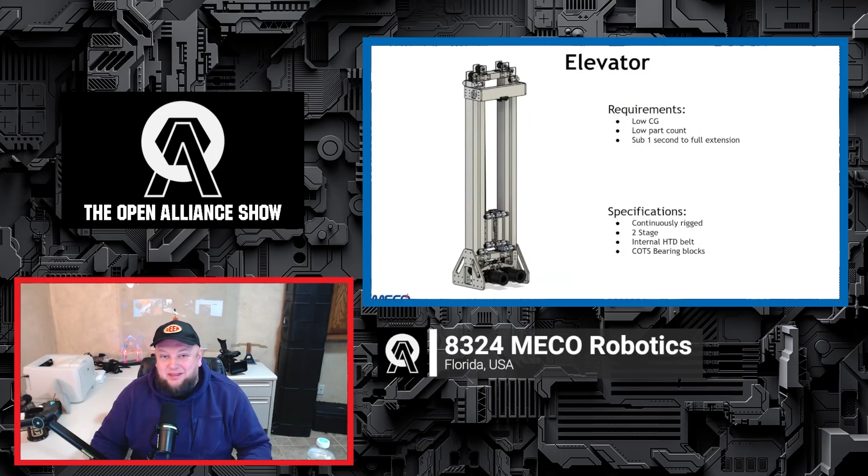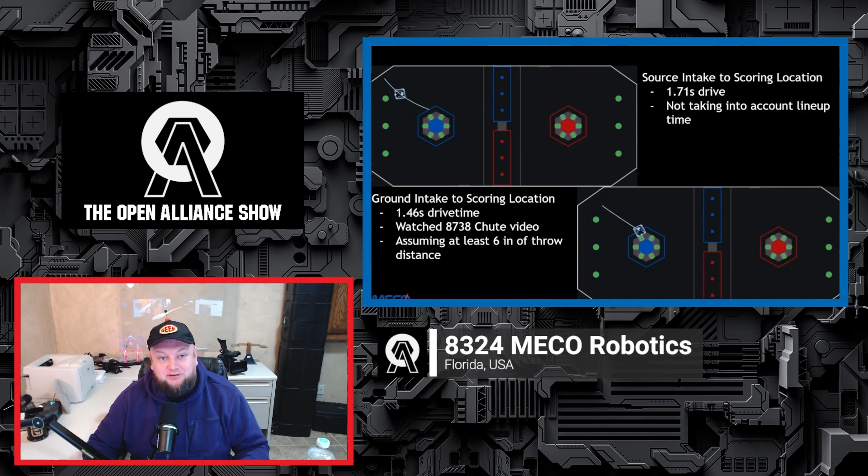Coming up on this edition of the FRC Open Alliance Show, 8324 MECO Robotics from Florida is in to catch us up to speed on everything they've been working on. We jump into their game strategy a little bit, but really hitting hard into their robot design, where they're at so far in regards to CAD and showcasing some prototypes as well. They're doing something really interesting with a dual intake approach for the Coral this year and showcasing how they're looking at scoring with this fork interesting design that they're using for level 4 scoring as well too. So a lot of great stuff with that. We're talking about some of their custom machining and then jumping into some of their auto routines and pathing, what they're looking at doing for that. We'll walk through a couple different autonomous strategies that they have in mind as well. So let's learn more about MECO Robotics coming up here on the FRC Open Alliance Show.

Let's welcome on 8324 MECO Robotics coming in from Florida. They're competing weeks 3 and 4, and we can't wait to jump into all the awesome topics and progress that they've been working on so far.

So welcome, students. If you don't mind, can you introduce yourselves? Let us know what you do on the team, and we're going to hop right into some of your game design and strategy. I'm Nate, I'm the lead programmer on the team. I'm Lily, I'm the team captain and the media lead. I'm Aaron, I'm one of the designers. And I'm Mason, I'm the mechanical lead for the team.

All right, so we're going to go ahead and start off doing a little intro for our team. So we are MECO Robotics, we are a 5th-year team. We started right at the beginning of 2019. That also means our first season was 2020. We were in the unfortunate situation where the Orlando Regional was our first competition, so we were on the field for the drivers meeting, and that was when they had to send everybody home. So that was unfortunate. We switched online for about a year and a half before we started meeting back in person. And now we are located at Orange County Academy in Bithlo, Florida.

Bithlo is kind of an underserved part of the East Orlando community. Very poor infrastructure, there's no place to earn a GED, there's not many job opportunities or anything like that. So our goal with being here and running our FRC and our FLL team is to kind of provide a STEM outlet and a light in the community that didn't really have that before.

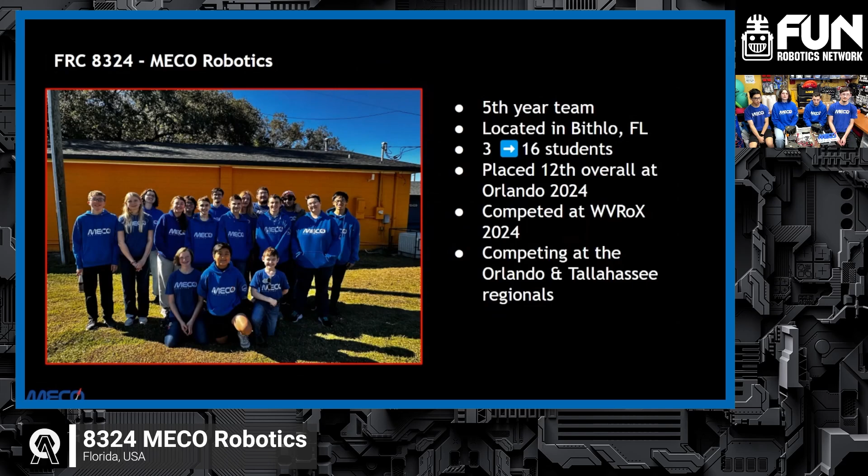So last year we had our best record year yet. We competed at the Orlando Regional, placed 12th, and we captained Alliance 7. That was also the first time we were ever Alliance captains in our team's history, which was awesome. Some other stuff notably that we've done is we went to the West Virginia Robotics Extreme this past off season. That was super fun, so we got to travel up to that. And then we'll be competing at the Orlando and Tallahassee Regionals this upcoming season.

So moving past onto that, I'm going to go a little bit into our robot design and kind of how we decide on what design we want to focus on for the year. So for the past season and this season as well, we compile a MoSCoW list at the beginning of the season, which a lot of teams do. It's basically must have, should have, could have, won't have. So basically we go through a list of what abilities we want the robot to be able to have. So obviously our number one on must have is swerve drive, that's mandatory, we definitely absolutely want that. All the different scoring elements that we want to be able to complete.

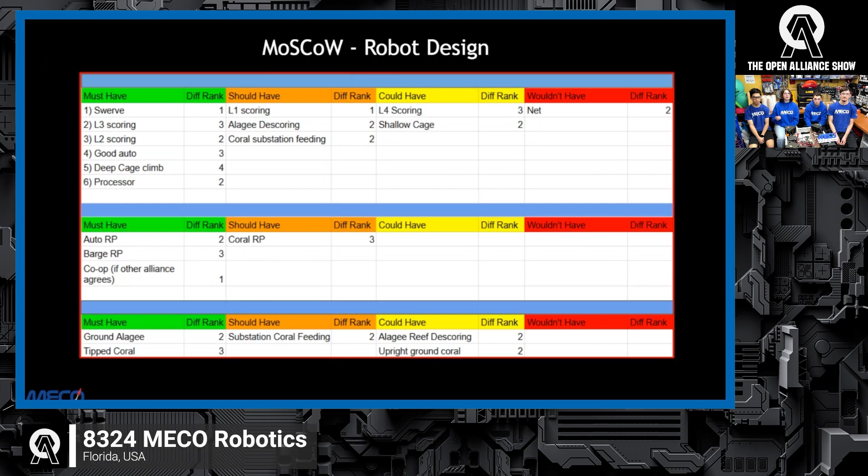And then we rank those on a 1 to 5 scale based on our team's unique abilities for that year - the manpower we have, the materials we'll be able to access, our budget, and different things like that. We filter through everything possible that we're able to complete in a game and then choose our abilities based on that MoSCoW list.

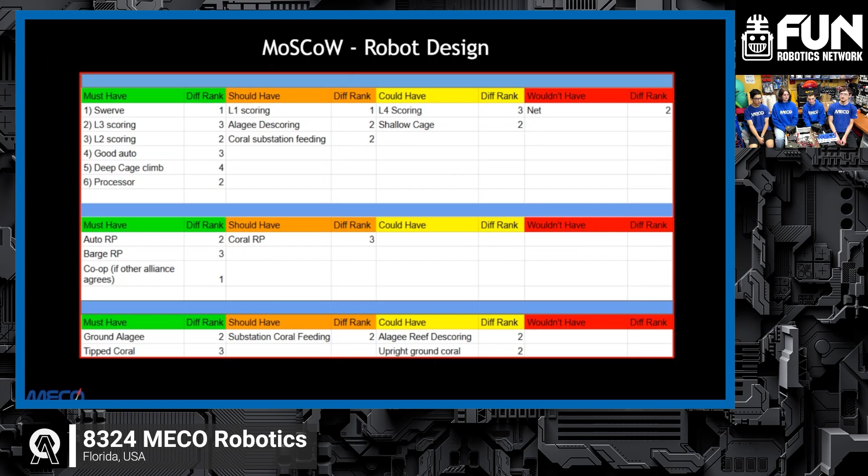So now I can pass it over to design and some of the decisions we made. This year we're going with a lot of the designs we've seen so far, which is the main part of the robot being the elevator. We have some requirements for those designs. The main one for the elevator is having a low center of gravity, low chance of tipping, and also being able to have our torque still kind of high.

It's having it semi-lightweight so that we can still keep our weight down. Having a low part count - a lot of elevators are very complicated and have a lot of parts that need a lot of manufacturing, which also increases complexity. We wanted to keep that low. And then having a sub 1 second to full extension to be able to score L4 as fast as possible without being the bottleneck of the robot.

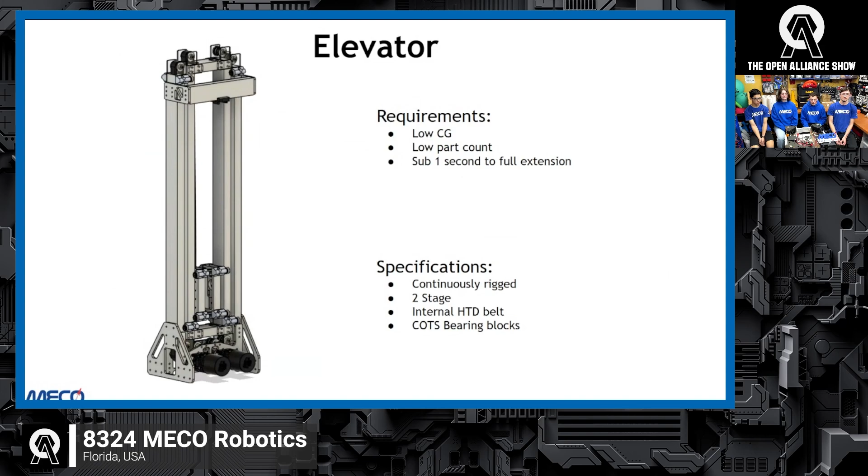Moving on to the next subsystem, we have the arm. The arm goes on the second stage of the elevator. The main requirements for that were being extremely lightweight, so we could still keep that sub 1 second for the elevator, and being easily manufacturable. We have some limits we'll talk about later. We want to be able to replace the arm if need be, and also iterate. The other requirement is being sub 1 second to full rotation, so that when we have coral, we can still reach L4 and that's not being the bottleneck.

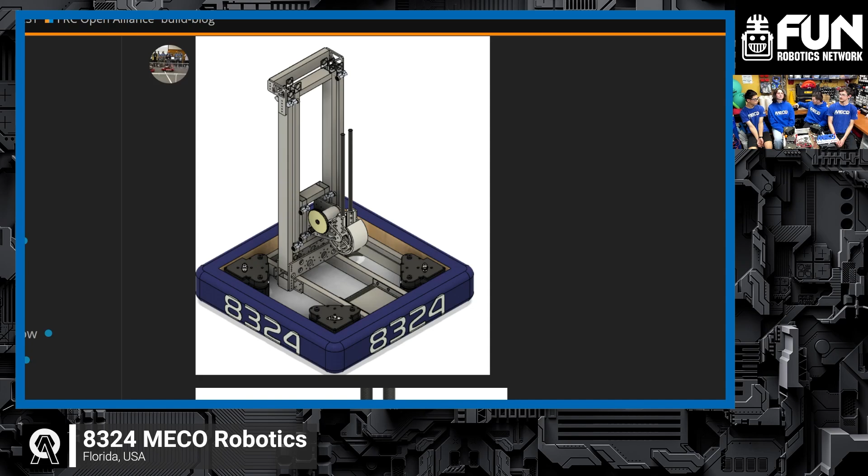The way we did that is using a carbon fiber tube we have here. We got it donated from rowing oars, and we cut them down so they remain extremely lightweight, very cheap because they were donated, and very strong and very rigid. For the main gear and the main arm, we have a herringbone gear that was 3D printed, so it's extremely easily manufacturable and we can recreate it while also being able to iterate. If it breaks, we can remanufacture it, and that uses 2 polycarb plates for a lot of rigidity.

For the mounting of the tube, we have 3D printed 2 mounts that clamp the tube. Those are custom, and they enable the arm to be very rigid still at the bottom and at the top for the end effector.

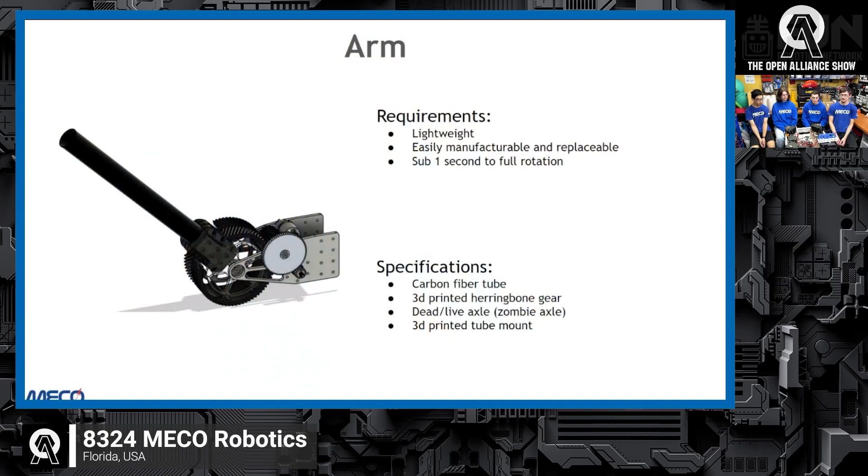Moving on to the next subsystem, we have the intake. We decided to go with an intake this year. It enables us to get a little bit closer to the reef without having to go all the way to the human player station. We'll talk about that strategy a little bit later on as well.

The requirements for that were being full width so that we could take in coral from 2 sides of the robot and use the whole side of that. We wanted it to intake coral from essentially any point when the coral is laying down on its side, without having to worry about orienting the robot around the coral. And then touch it, own it, so that when we get near the coral, we can immediately put it into the robot.

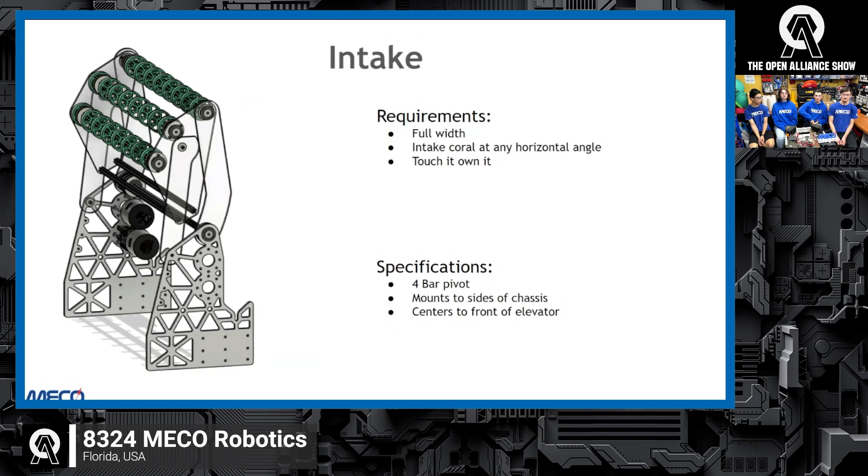The way we're doing that is using a 4-bar intake to maintain a low vertical profile when it's stored in, while still being able to deploy out far enough to reach coral where it would be hard to get otherwise. It centers to the front of the elevator, and the arm grabs it and then can raise the whole elevator. The next subsystem we have is the drive base.

The drive base is a little bit unique this year. A lot of people have been going with unique designs. This one we thought of actually before the season, and it worked perfectly for this season.

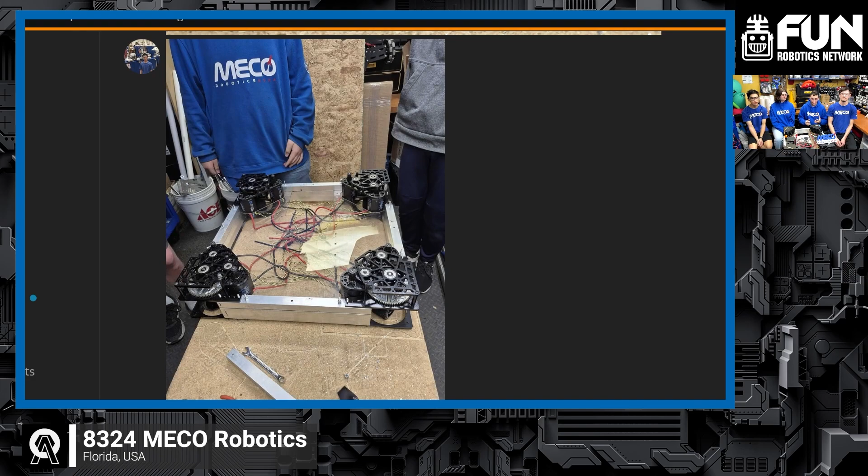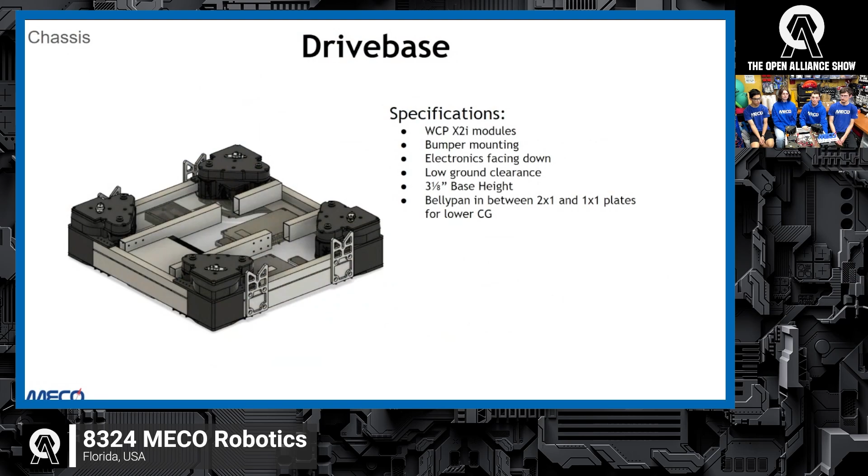This season has very little bumps or anything on the field that could get in the way of the drive base, so it enables us to get even closer to the ground than a normal drive base chassis would have. So instead of using 2x1 or even 3x1, we use a 1x1 and 2x1 combination with polycarb in between. The 2x1 is on the bottom and enables us to put the belly pan sandwiched in between the 1x1 and 2x1, with all the electronics facing down. That keeps our CG low while still making the electronics isolated from the rest of the robot, and we can still mount things to the top of the robot with a lower CG than most 3x1 designs.

Can you talk about your decision making of wanting to go with a square drive base, and how that worked out for your full design? What made you choose that, or why was that the best or most effective design for what your team decided to go with this year?

So in terms of the square drive, last season we ran our swerve modules in a square, but we also had an intake sticking outside of the frame for the under-the-bumper intake. While that was great for protecting the intake, the maneuverability of the robot decreased, since now we have to worry about maneuvering a big 6-inch sticking out intake while also maneuvering a swerve base around other robots. This year we saw that the reef is very close to the source, so it's going to be a game of cycle times. If we're able to be super fast and super maneuverable, we're able to intake coral faster.

Even though only one opposing robot is allowed to play defense on your side, we realized most of the defense being played this season may actually be our own alliance, where we have 2 sources but 3 robots on your alliance. So trying to figure out how to have 3 robots intake from 2 sources and choreograph those cycles, we found that we may want to be able to maneuver around our alliance partners. Having a ground intake will help decrease our cycle times, since we're no longer lining up or fighting to get fed from the source. We can just pick it off the ground and get out of the way.

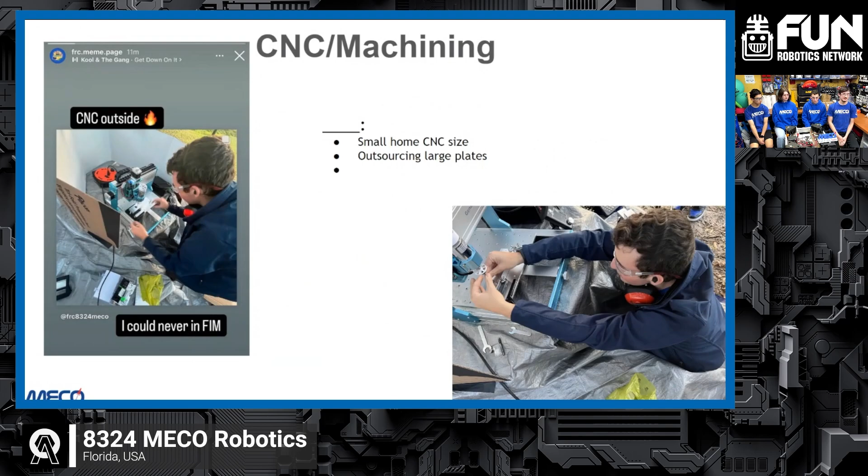And then we can just have it manufactured pretty easily. The other thing that's very unique to our team is that we use a shaper, which is essentially like a handheld router, like a CNC, but it works really well for polycarb and wood specifically, which allows us to get very accurate bumper shape and size, and put pockets in the bumper if we need to.

It also allows us to do super fast iteration for any polycarbonate components, because we can just whip out the shaper and immediately handheld route the thing. We can design a part in a day and machine it in a day and immediately test it, potentially that same day if we have enough time. So that allows for super fast iteration.

And polycarb is also a great material, super flexible. We have a ton of it, we love to use it. Almost every single one of our robots has used it. It's one of the greatest materials, I think, for our team. I love it a lot.

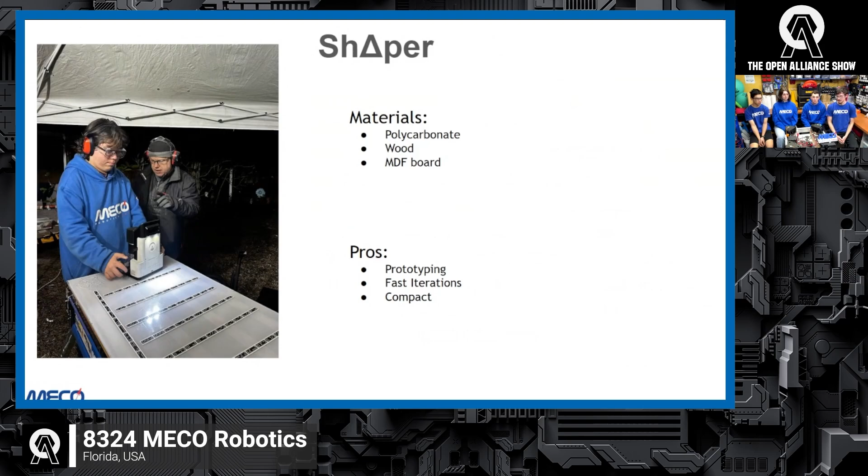And we can also use MDF board for prototyping. So we use that for our intake, which is down here, which may not be in frame, but that's okay. It's an MDF board intake, and each part is manufactured with that shaper. So we can just manufacture it all in a day and test it to see whether our design is actually working or not, which again allows us to have really fast iteration and actually test those angles and compressions and everything we need.

And then another thing that we got is custom wheels. We've experimented with custom manufacturing our own wheels, similar to how the Vex wheels work. So instead of having to buy tens, not hundreds, but within 10 to 100 wheels for intakes, because intakes use a lot of wheels, we can just use molds to manufacture the wheels ourselves, which allows us to have great customizability over the wheels.

Like we can either have pockets like the Vex ones come with, or we can make it solid and just do it like that. Or we can make it an inch wide, maybe 2 inches wide, whatever you want to do.

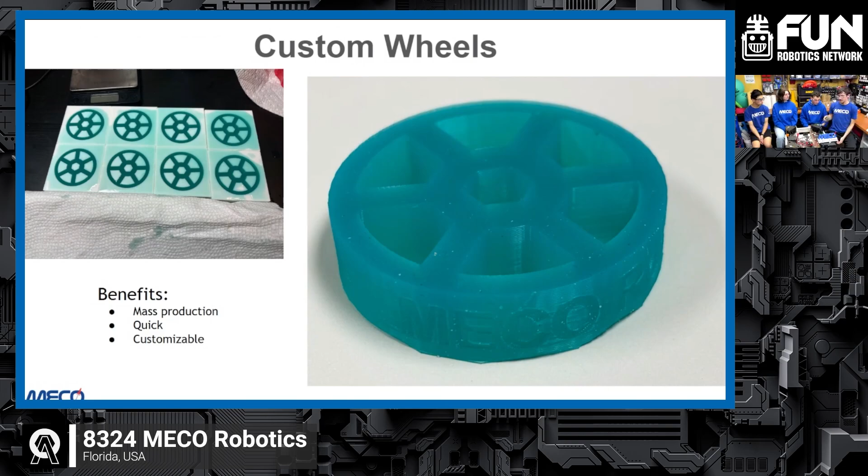We can also manufacture parts like these. This is like a WCP grip lock kind of thing, this TPU tread. What we're going to try to experiment and iterate on is using 90A durometer silicone to fill a mold and then potentially manufacture our own tread if that's possible. We're looking into that, and that might be a great option for us.

As we wrap up here, I never want to leave what you're doing for autonomous and vision now because there's a lot of great stuff, especially on your Chief Delphi build blog that you've been mentioning as well too. So let's hop into some of the different pathing processes you've been doing and what you've been all working on from that front.

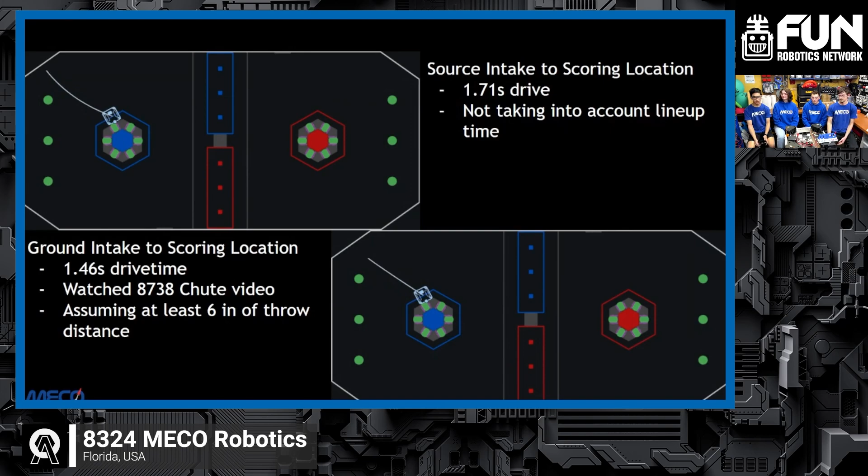Sure. So this season at the beginning of kickoff, we looked at the field and we realized vision is going to play an essential part into this robot this year. Because looking at the reef from the driver station, all of the scoring locations kind of clump together and it just becomes really difficult to figure out and line up your robot to score.

So on our competition robot, we have a Beelink mini PC that is going to be running Tag Slam, and then we're running a cluster of Orange Pis to do game piece tracking using the neural network. Shortly after that, we ran some path analysis, where basically we ran all of our calculations of how fast a robot would be based on the motors and gear ratios we chose in Recalc.

We're not assuming lineup time, even though we're hoping lineup time would be built into the path with computer vision, but we're taking that variable out for simplicity. We're also taking out the variable of having to intake. Right now we're solely focused on the driving path.

If you look in the top left-hand corner, that's the path for the source intake. From the source to the scoring location closest to us, that's around a 1.71 second drive time, versus the ground intaking. We watched a video from 8738 where they were trying to figure out how far the coral would roll as you throw it down the chute, let it fall, or physically force it down the chute.

Those rules may change based on the new Team Update 7, based on how far you're able to stick your hand through the chute. But just based on dropping, give or take 6 inches. If you look at the ground intake in the bottom right-hand corner, that's around a 1.46 second drive time, so it's a difference of about 0.3 seconds.

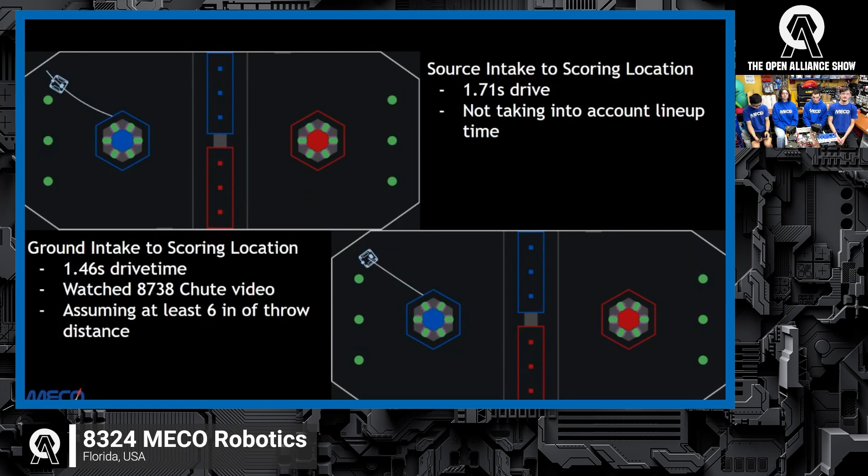That doesn't sound like a lot, but when you're trying to get the reef RP and doing 5 cycles on 4 different levels, that will save a lot of time. Moving to the next slide, these are actually mapped out cycles, including driving there and driving back. From the source, we're looking at a 3.42 second cycle time, versus the ground, we're looking at 2.92.

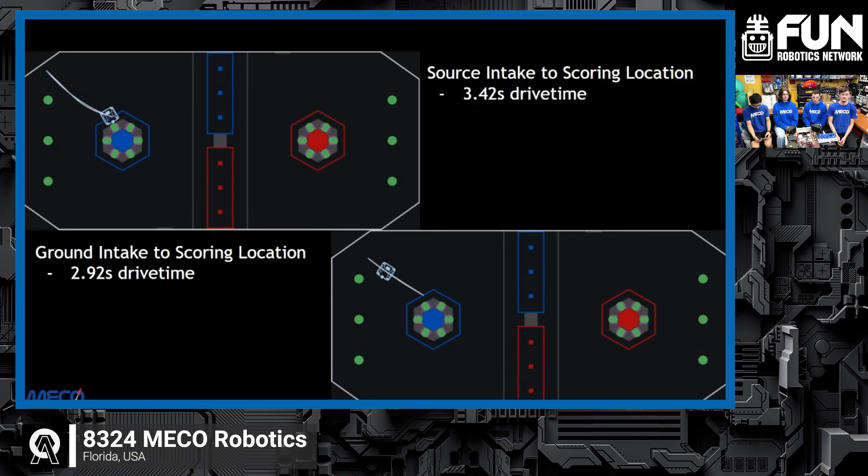You can see 5 different locations that we go to drive and score. To score those 5 locations is a 14.05 second drive time, and that's for just one level. We can multiply that by 4 for the different levels, which gives us insight into a perfect-scenario, driving-based estimate of how it would take us to get to the scoring locations.

Going on to our last slide, this is one of our possible autos that we're looking at this season. You can see up top we kind of clump around the source for ground feeding, but basically we'll start in the center of the net area and rush straight to the center, driving forward. This auto is 3 L4 scores.

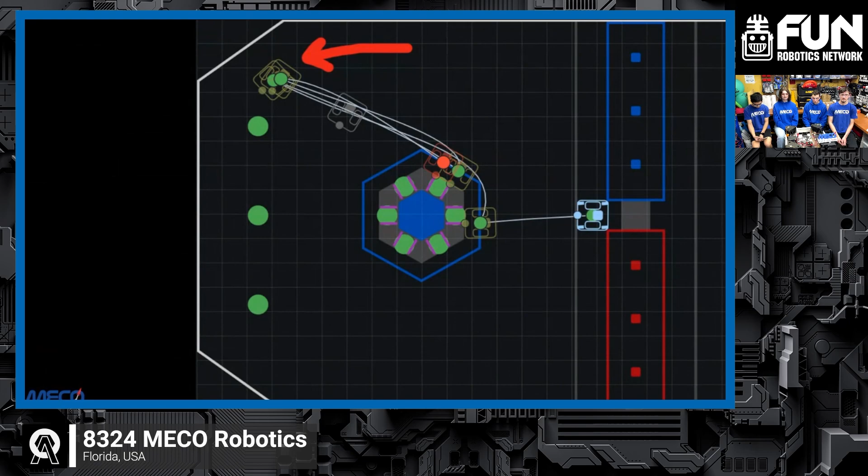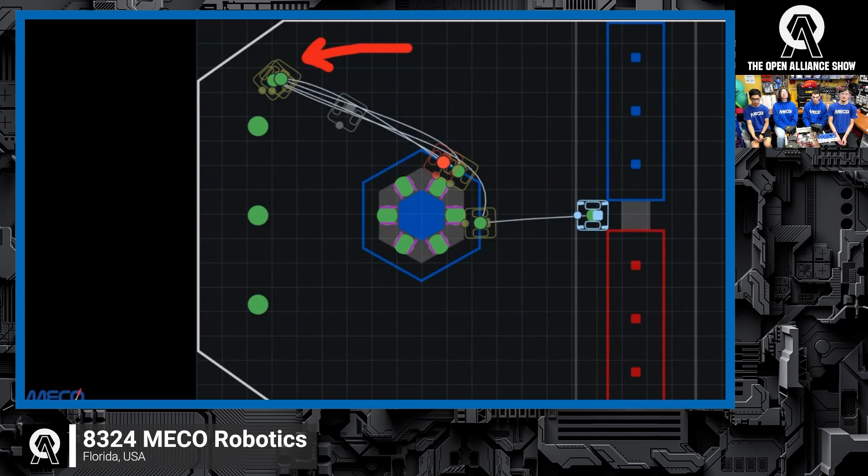We'll do the top one, then fill up the next 2 closest to us. I think this was around a 13-second drive time without lining up, scoring, or intaking, which seems pretty good. It may be a buzzer-beater auto where we'll have to hope it gets that last cycle off, but I'm hoping we can pull it off this season.

I'm sorry, I didn't quite catch—are these all L1 scores, or are they on different levels? So for this auto, these are all L4 scoring. For the path analysis, that was just the pure driving, we weren't worrying about scoring or intaking—just to give predictions of how, in a perfect world, fast we can get to that scoring location, and then we can compare our actual driver's path versus the perfect scenario case.

No, I love all the thought process gone into this. MECO Robotics, it's been really cool to have you on. Make sure you're following their Chief Delphi build blog for all their updates. They're competing weeks 3 and 4, so we can't wait to see how you do. You still have a little bit of time to get there, but I know the time crunch is real. We can't wait to keep following your progress. Thanks a lot, and good luck the rest of the way. Thank you, thank you so much.